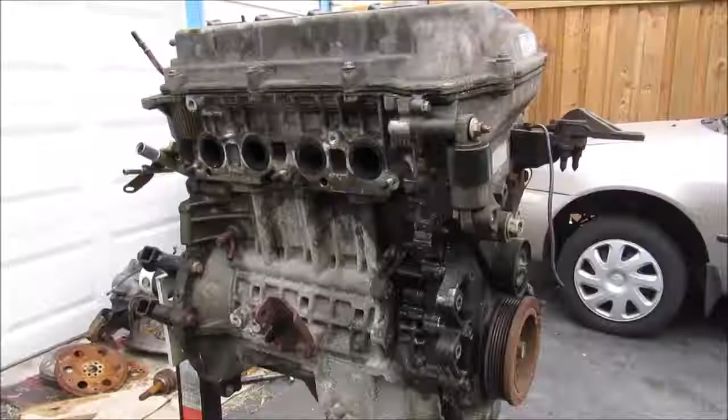Today I'm going to show you what's inside of an engine and how it works to power your car. In this video I'm going to start with the overview, the disassembly, and then the individual components.

The engine is broken up into 5 main subcomponents. At the top here we have the valve cover, then the cylinder head, then the combustion chamber or engine block, and then the crankcase at the bottom here, and then the oil pan down below.

This here is the front of the engine. We've got the crankshaft here that powers the harmonic balancer, which turns all of the accessory belts on the front of the engine. Inside of the timing cover is where the timing chain is that goes from the crankshaft to the camshaft.

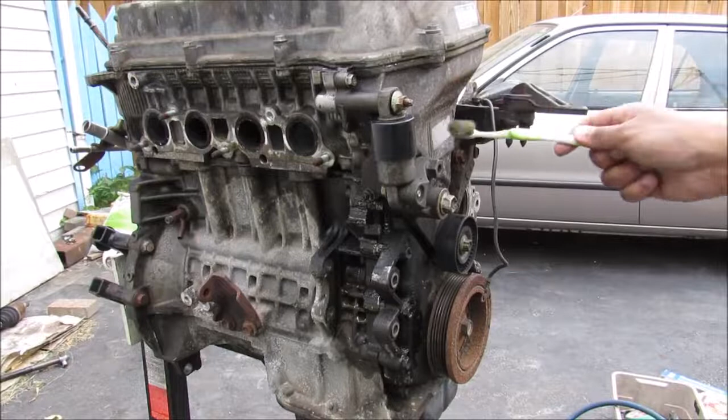Over here at the top of the cylinder head on the intake side of the engine, air goes in here. Out at the back here is the exhaust side of the cylinder head where it goes into the exhaust header. Over here we've got a couple of inlets and outlets for your cooling that goes to your heater hoses and your radiator hoses.

Down at the back of the engine is the crankshaft where it connects to the flywheel before it goes to the torque converter in the transmission.

In the engine block here we've got the coolant that enters here, we've got a water pump over here, and the starter that sits over here. Further down at the bottom we've got your oil filter, your oil pan, and then your crankshaft sensor. So we all know the basics of how an engine works.

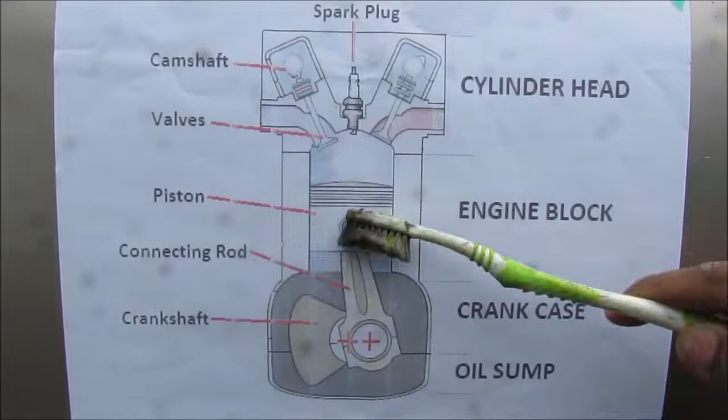We've got the cylinder over here and that has a piston inside that moves up and down. When fresh air with gasoline is drawn into the cylinder, we've got a spark plug that ignites it and causes an explosion.

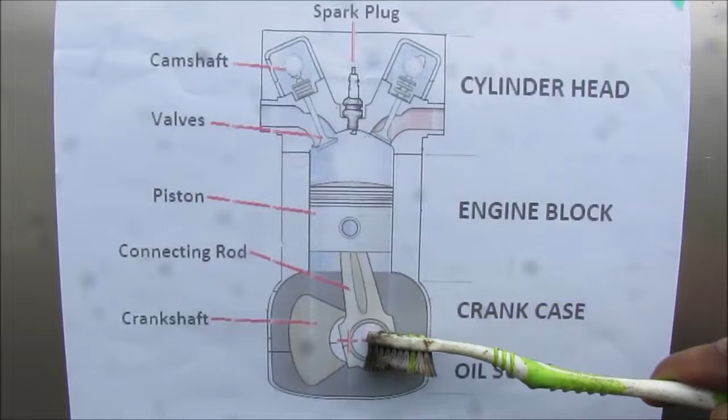The explosion pushes the piston down, and that pushes the connecting rod down against the crankshaft, which is at an offset, and that causes a torque on the crankshaft, making it rotate. That rotational motion is transferred to the wheels through the transmission.

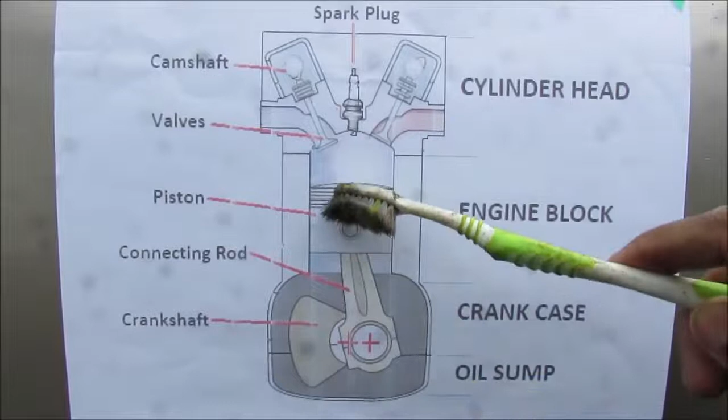When the piston moves back up, the exhaust fumes move through the valves into the cylinder head and then out the exhaust manifold. While the crankcase is the heart of the engine that produces rotational motion, the cylinder head is pretty much the brain of the engine that controls the valves through the valve train.

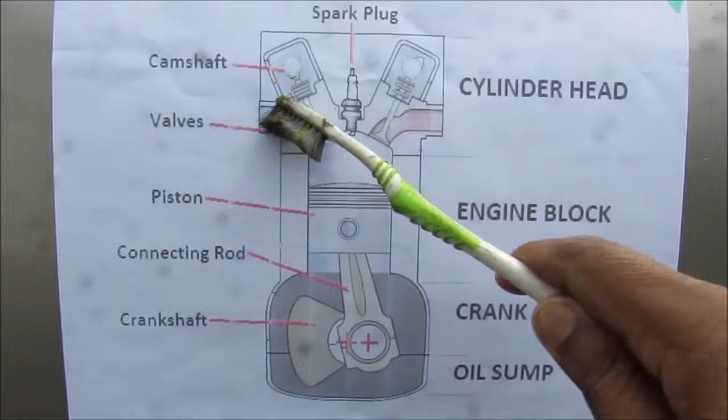Now in order to disassemble the engine, I'm going to start by removing the timing cover as well as the valve cover. I'm going to first start by removing the crank pulley bolt, and the pulley comes off.

Next I'm going to remove the valve cover from the top of the engine. With all the bolts removed, I can lift off the cylinder head cover or the valve cover.

So here's a look under the valve cover. This is a dual overhead cam engine, which means that there are 2 camshafts that control the valves that go down into the cylinders.

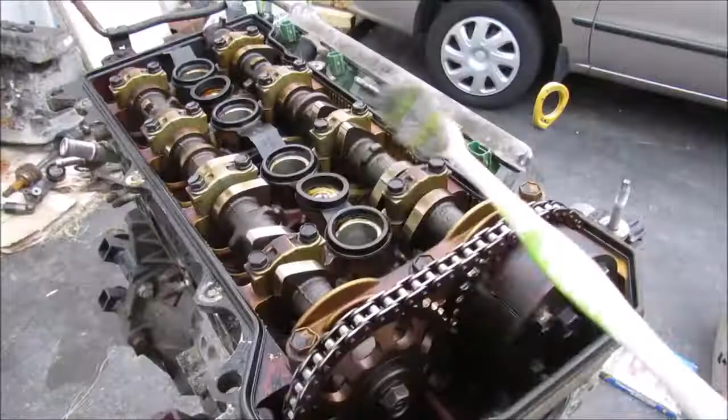Here we've got 4 spark plug holes, and then the timing chain over here for these 2 camshafts. On this engine, this is the exhaust cam that goes out to the exhaust manifold, and on this side it controls the intake valves which come in from the intake plenum. The variable valve timing happens on the intake side only.

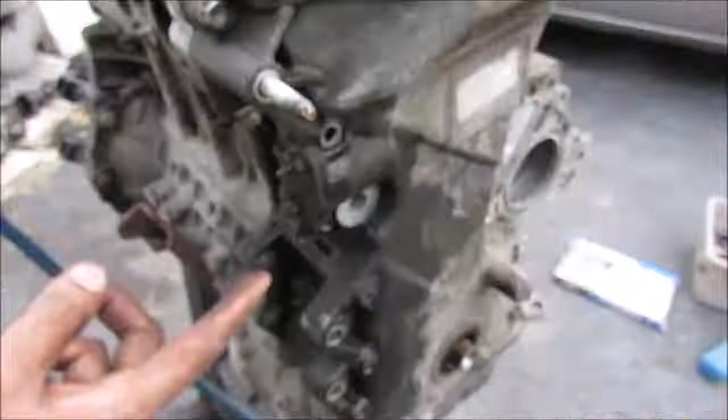With the valve cover removed up at the top here, I'm going to proceed to remove the timing chain cover. The timing chain tensioner is located inside of here behind the timing cover, and then I'll remove that.

With all the bolts removed from the timing cover, I can then proceed to remove it from the engine block. In behind the timing cover here, we've got the crank sprocket which spins the chain.

The chain will then spin the intake and the exhaust cams before it goes back over here where it gets tensioned by the tensioner. Next I'm going to remove the timing chain tensioner, then I can remove the guide.

Just to demonstrate how the timing chain works, you've got the crankshaft here which turns this chain, and that turns the cams at the top. Now with no tension on the chain, I can go ahead and remove it.

So this is how the camshaft rotates. Underneath these caps here is your journal bearings, and that's the interface between the camshaft and the head itself. That needs to keep well lubricated in order to operate smoothly.

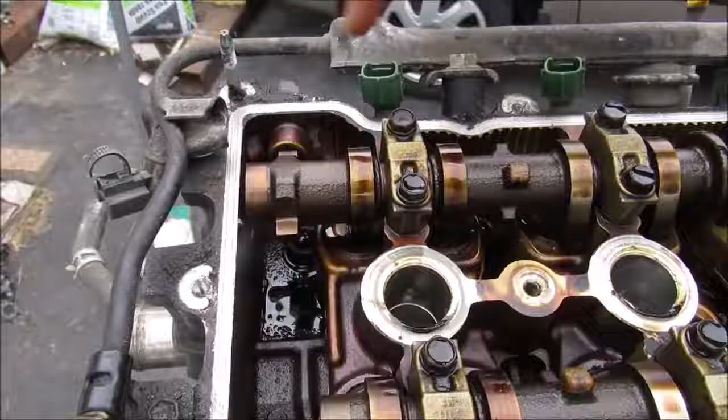Over here is the cam position sensor, and it senses the position of this camshaft according to these tabs on the end of the camshaft on the intake side. The tab moves in front of the sensor and the sensor will pick that up.

Next I'm going to remove the camshafts. There's a couple of 12mm bolts over here on the timing side of the engine, as well as all the 10mm bolts that hold the bearing caps on the intake and exhaust side. I'm going to remove these cam bolts.

14mm. This is the variable valve timing gear. And now I can remove the intake camshaft off of the engine head.

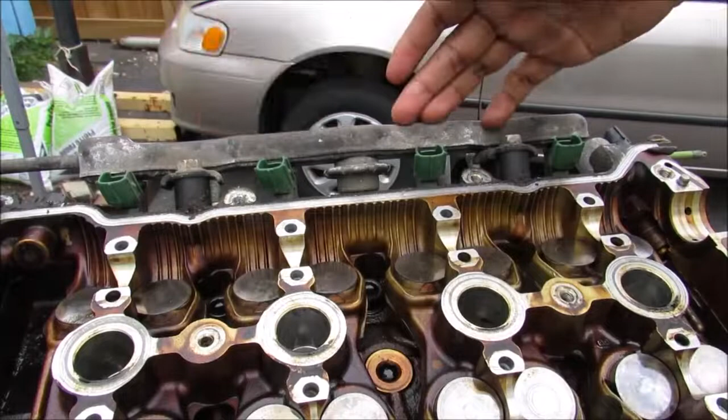Over here on the intake side of the head is the fuel rail. It's held in by these 2 14mm bolts. These green things here are your fuel injectors. And then I can pull this fuel rail off.

This here is where the oil control valve is located for the variable valve timing on the intake side. And then I can remove the valve.

Now the head of the engine is held in by 12 bolts. These are bi-hexagon 10mm bolts. I'm just going to be using a plain hexagon 10mm socket to take them out. And this is what the head bolt looks like.

Alright, so now that all of the head bolts have been removed, I can lift off the head from the cylinder block. And now I can remove the head gasket.

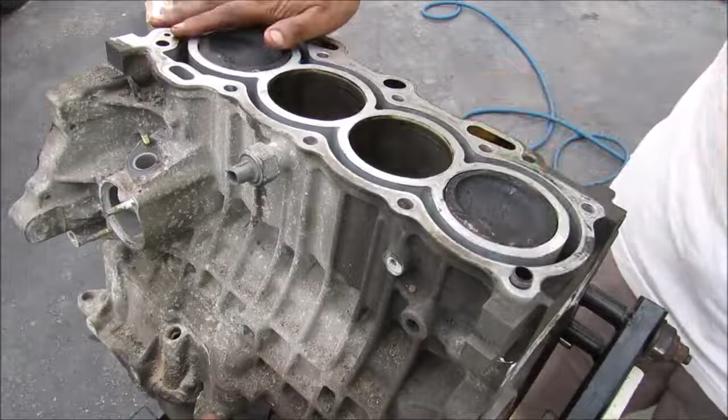So this here is the engine block with the head removed. You can see this is the pistons here. This is a 4-cylinder engine. You can see when I rotate the crankshaft clockwise that the pistons move up and down.

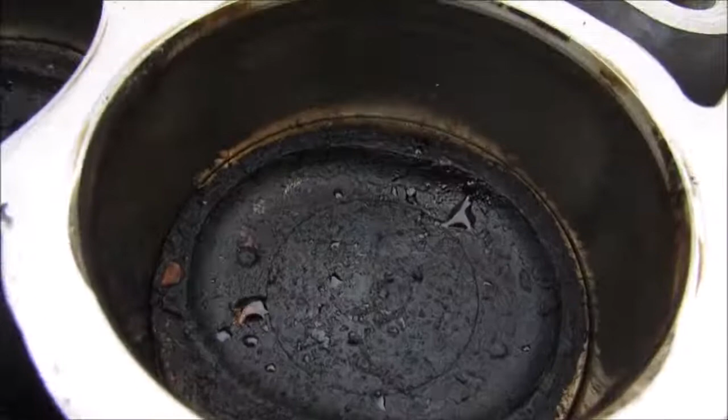You can see the general condition of this engine here. The pistons have a lot of carbon buildup, but the walls of the cylinder are smooth and don't have any major grooves. So now I'm going to rotate the engine upside down so I can work on the bottom.

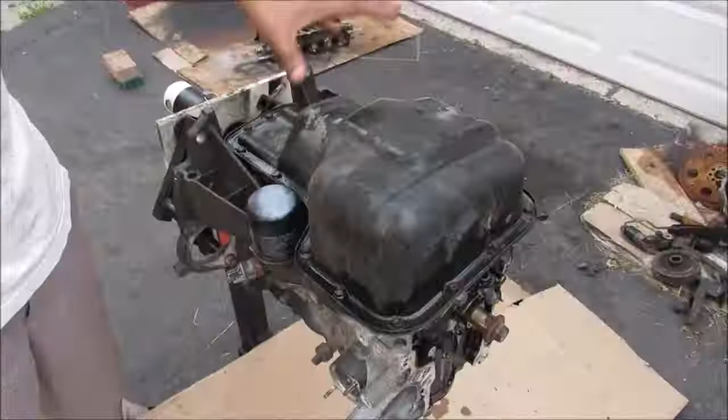So with the engine turned upside down, I'm going to next remove the oil pan. It's held on by 16 10mm bolts and nuts that go around the circumference.

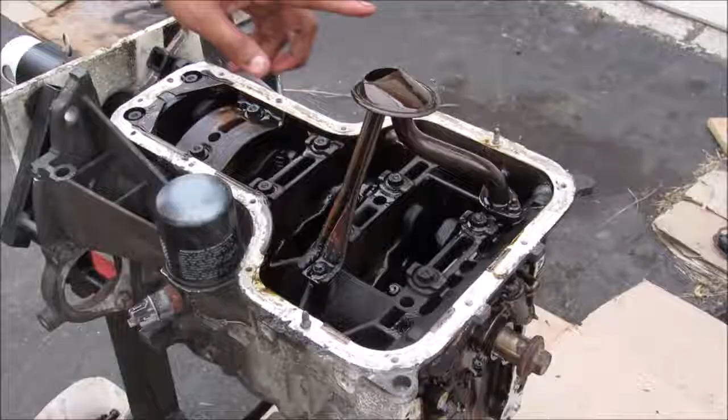This here is the oil pickup screen and tube. It picks up oil from the sump and it feeds it to the oil pump over here.

Now if you look inside of here, you can see how the connecting rods and the pistons move up and down when I turn the engine. This here is the crankshaft. It's pretty much the heart of the engine.

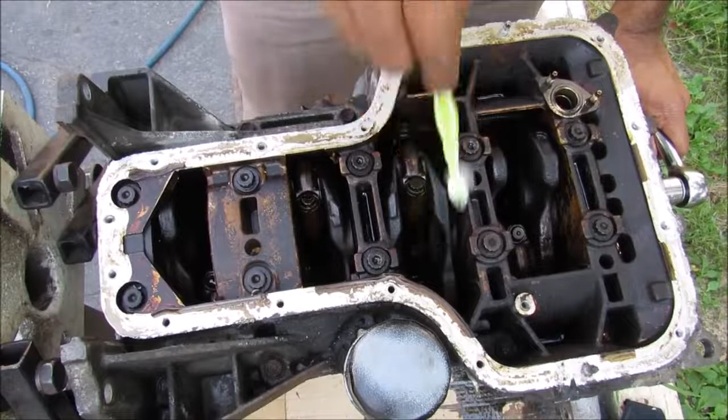Now throughout the middle here we have 5 main bearings that run through the center of the crankshaft. Underneath this bearing cap here is where the connecting rod, which moves up and down with the piston, connects to the crankshaft. And you can see that it's offset from the center line of the crankshaft. The distance between the center line and the connecting rod is called the throw, and that will determine the stroke of the piston.

While the engine is running, the oil pump ensures that this entire crankcase assembly is well lubricated in oil.

Next I'm going to remove the bolts that hold the main bearing to the crankcase. These are 12mm bolts. I've got a 12-point socket for it there, and I'm going to use it on a breaker bar to break them free.

Now I'm going to break free the bolts that hold the bearing cap onto the connecting rods. These are 12-point sockets, 10mm. Now I can remove this bearing cap.

So with the connecting rods from the pistons free from the crankshaft, I can just move the crank a little bit and reach down with my brother's toothbrush and push the piston out the bottom of the engine.

Oh crap, I got a toothbrush in the engine. And I can catch it just like that.

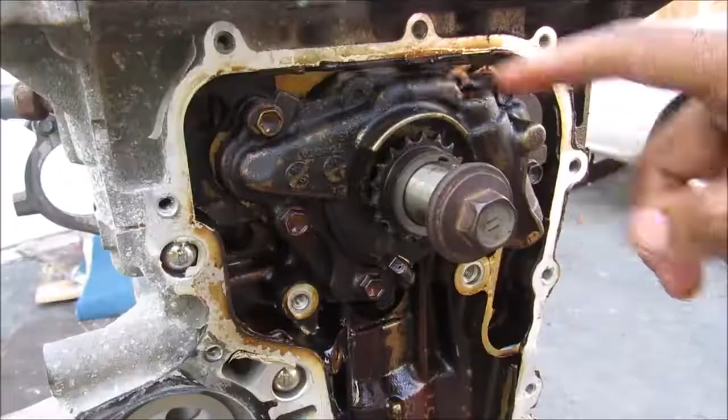And there's a piston. This here is the oil pump. It's responsible for pressurizing the engine to ensure all of the components are lubricated properly.

And then the oil pump, you can see that the crankcase here is a separate piece of the engine block down here. So we're going to have to split this and remove the top part in order to get the crankshaft out.

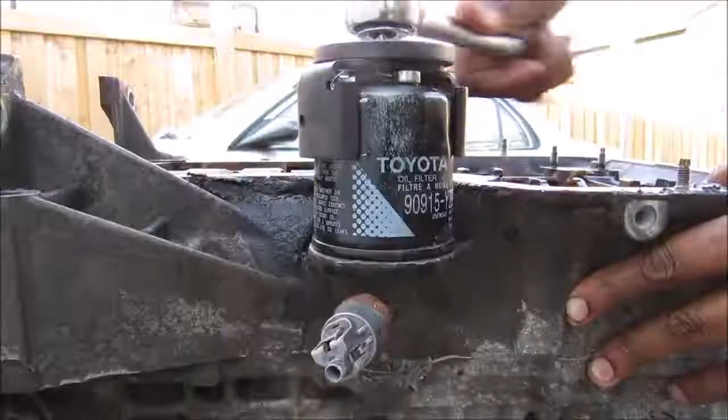Remove the oil filter. So with the oil filter removed, I need to remove this 12mm hex bolt. Now I can remove the 12mm bolt that was behind the oil filter.

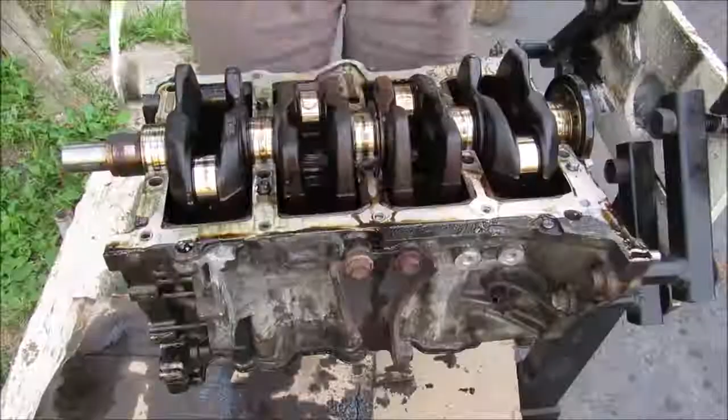Now I can remove the entire crankcase off of the bottom of the cylinder block. So with the crankcase removed, we have a clear view of the crankshaft with the offsetted connecting rod bearings up here, the 5 main bearings over here, as well as the counterweights over here.

So what's also interesting are these holes on the bearing surfaces that allow oil to penetrate between the bearing itself, the crankshaft, as well as the engine block assembly. This rubber seal over here is called the rear main seal, and that seals off the crankcase, which holds engine oil from the transmission side of the engine.

A lot of times these will leak and cause a leak between the engine and transmission, and it's very expensive to replace because you have to completely remove the engine or the transmission from the vehicle.

Now I'm going to remove the crankshaft from the engine block. It's pretty heavy. And here's a look inside of the engine block with the crankshaft removed. Here we have the bearing surfaces where the bearing rides up on.

You can see that there's a slot inside of here where oil will come from inside of here to lubricate this bearing. Now sometimes you'll hear the term "you've spun a bearing," and what that means is that if this bearing is starved of oil, it fuses to the crankshaft and that causes it to spin. And once it spins, it leaves a gap on the bottom of the crankshaft, and that causes the engine to knock because of that gap that you left down at the bottom there.

This here is the engine block where it mates to the head. We've got a coolant jacket that runs around the cylinders to keep it cool. Now it's very important that this surface is machined really flat, because when the head is bolted on, it has to hold a lot of compression from the combustion that happens in the chamber.

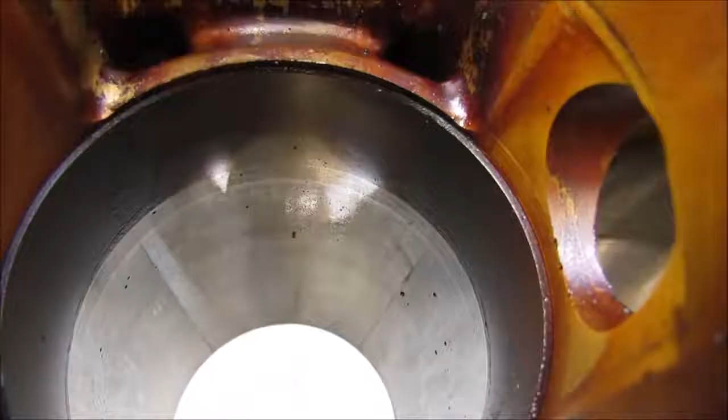Over here we have 3 oil return galleries that will take oil from the head and return it back down to the sump. And this little hole over here supplies the head with oil. Now when they say that your head gasket has blown, that means that this gasket has failed and it's losing compression between cylinders, or it could mean that the coolant is mixing with the oil, and that's bad. You'll also notice that the cylinder walls are actually a steel insert inside of the aluminum block.

This is the head of the engine removed. Now the cylinder head here houses the camshafts that control the valve movement throughout the 4-stroke cycle.

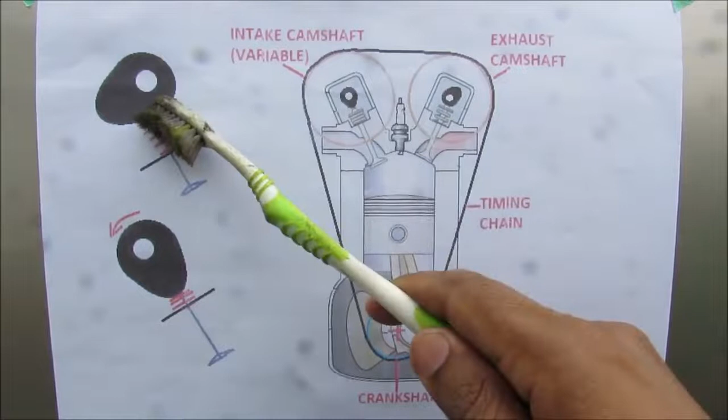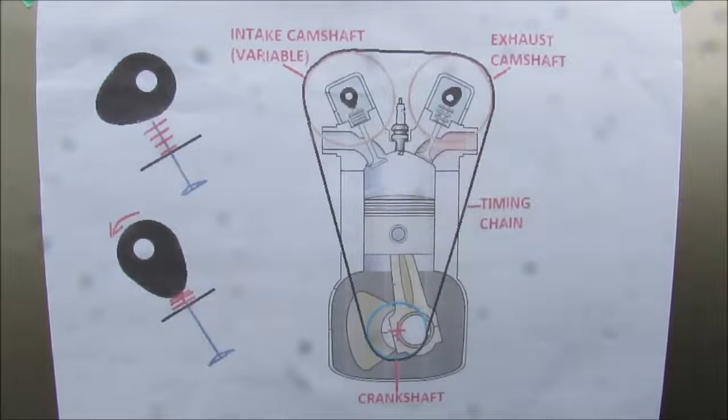Now the camshaft has a bunch of these eccentric cam lobes that rotate, and we've got the valves here which are spring-loaded. When the camshaft rotates such that the lobe hits the valve, it will actually squish the spring down, pushing the valve into the cylinder, and that will allow inlet air to come in or exhaust gases to escape during the cycle.

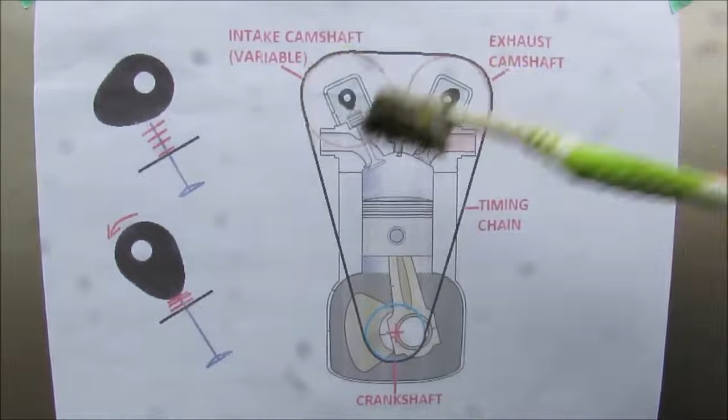Now in order to link the movement of these valves at the top here with the position of the piston in the 4-stroke cycle, we have a timing chain that goes from the crankshaft to the intake cam and then the exhaust cam. On this particular engine, the intake camshaft is variable, which means that the timing that this valve moves in and out can be controlled by the ECU.

We've got 2 exhaust valves and 2 intake valves on this particular engine for a total of 4 valves per cylinder. You can see that when I rotate the intake cam, how the cam lobes will actually push down on the valves, opening the valves into the cylinder head.

So if you watch the intake valves over here, as I rotate the engine, you can see that they're moving in and out according to the position of the camshaft.

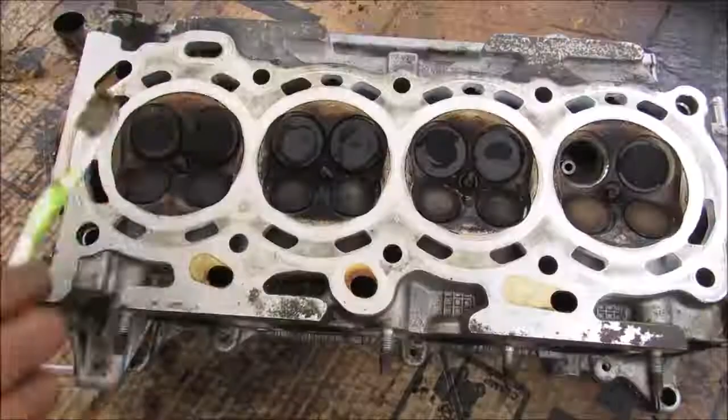So here's a look at the bottom of the head. You can see that all around the cylinders is the coolant jacket where it cools off the head, and then it exits out that side to the radiator. We've also got the oil return ports at the bottom here, as well as the supply port at the top here to lubricate the camshaft.

Now in order to remove one of these valves, I'm just going to use my spark plug socket and whack it with a hammer, and that will release the two holding pins. And I've got the valve spring, I've got the retainer at the top here. Now I can just pop out the valve from the bottom here.

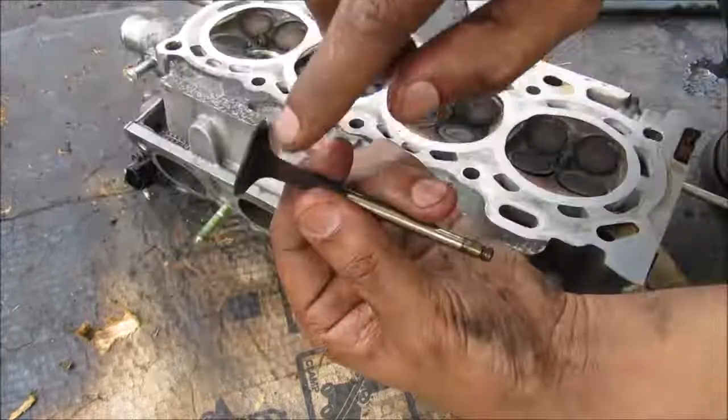And the valve here has this groove, which is called a valve seat, where it seals against the cylinder head. And you've also got an oil seal at the top inside of the cylinder head that seals against oil dripping down into the cylinder. Now if you look closely inside of there, you can see the valve stem seal, and that's used to prevent oil from going from the valve head into the engine.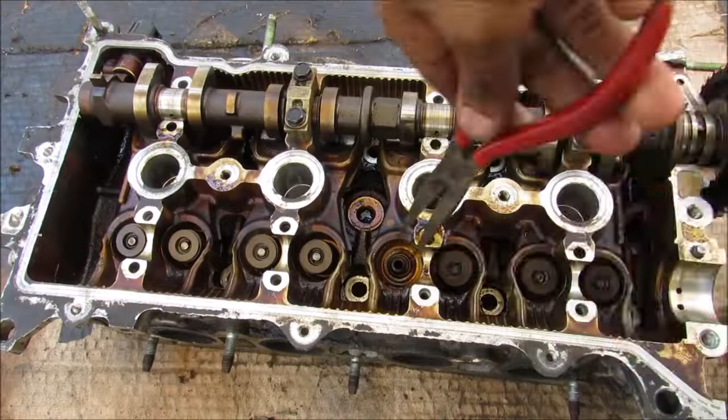Now each of these valves have a little cap on them where the camshaft will ride up against. Now the camshaft itself is pretty light and hollow, and it's got these holes inside here to help lubricate the bearing surfaces along the camshaft length.

Now this camshaft profile is specifically designed in terms of its width, its height, as well as its rotational position relative to the rest of the shaft to control the valve timing, when it will open, how long it will open for, and how deep it will open, as well as when it will open in the combustion cycle.

Now in between the intake and exhaust cams you have the spark plugs, and that provides a spark to ignite the fuel mixture in the cylinder. When the valve cover is on, you've got an ignition coil that sits on top of the spark plug, and that transfers the 12-volt signal from the computer into many thousands of volts to fire that spark.

You can see on the bottom of the head, in the middle of these four valves, is where the spark plug is located. Sometimes these spark plugs will wear down and get carbon buildup on them, and they'll need to be replaced in order to keep a good spark.

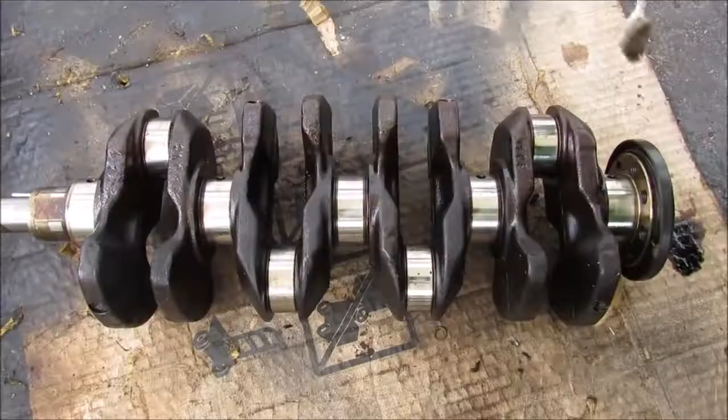And this here is the crankshaft. We've got the center that goes around with the 5 main bearing surfaces, and then we've got the counterweight, which is opposite of the connecting rod of each piston. Each counterweight looks like a casted piece, but it actually sounds kind of hollow. It's very important for this crankshaft to be extremely balanced because it will produce a lot of torsional vibration from the reciprocating motion of the pistons.

In a manual transmission car, we usually have a flywheel which has some weight to it that's mounted to the transmission side of the engine. In an automatic car, we've got a torque converter, and that helps to dampen some of that torsional vibration. On the belt side of the engine, we have what's known as the harmonic balancer, and that serves as the pulley, and it also helps to dampen some of that torsional vibration.

Now on the center bearing, we've got the semicircular thrust bearings.

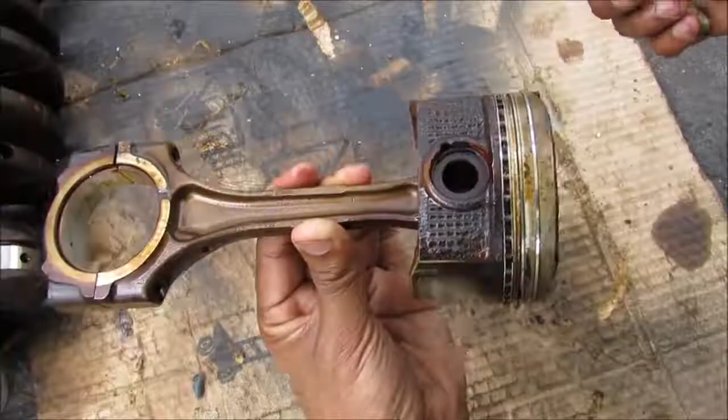So here we have the piston, and on this side is where all the explosive action occurs that pushes down the piston. On the side of the piston we have 2 compression rings, and then we've got an oil expander in between, followed by 2 oil rings on either side.

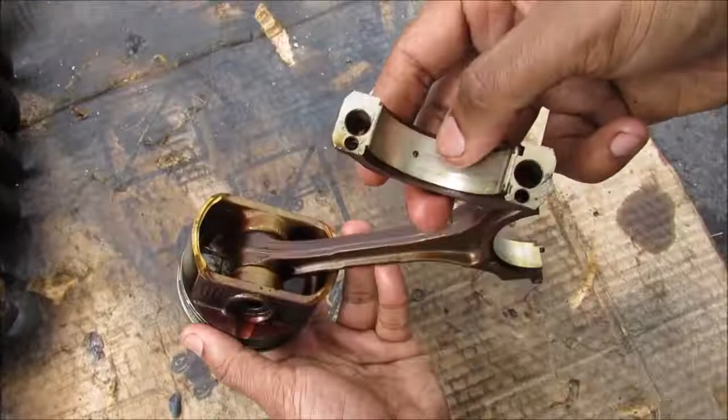Then we've got a piston bushing that connects the connecting rod. This is a forged piece that goes down to the bearing at the bottom. To aid with lubrication, we've got a little hole here where oil will come from the crankshaft and lubricate this bearing. Then it will exit here and go through the top of the connecting rod where it will spray into the piston walls as well as this bushing up here.

Now I can tap out the bushing. With the bushing removed, I can remove the connecting rod, which is just a forged piece, and the bushing. Up at the top we've got the piston rings, we've got 2 compression rings and the oil rings here, and I can remove it like this.

Sometimes these rings can wear down and cause a loss of compression or cause the engine to burn oil, and then you're in for an engine rebuild. The purpose of these rings is to seal against the cylinder walls so that the combustion is kept within the combustion chamber, and the oil ring will whisk off any excess oil so it doesn't go into the combustion chamber and get burnt.

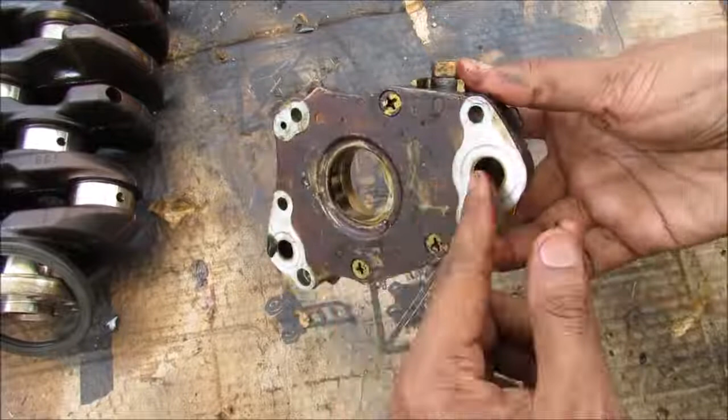This here is the oil pump removed from the engine. We've got the inlet here and the outlet on this side, and it's driven by the crankshaft of the engine. Now the timing chain cover pretty much seals the front half of the engine.

Over here we've got the crank seal, and we've got the crankshaft sensor, and the crankshaft sensor will read off of this little gear that's spun by the crankshaft. Over here we have a little hole that will feed oil to the timing chain tensioner.

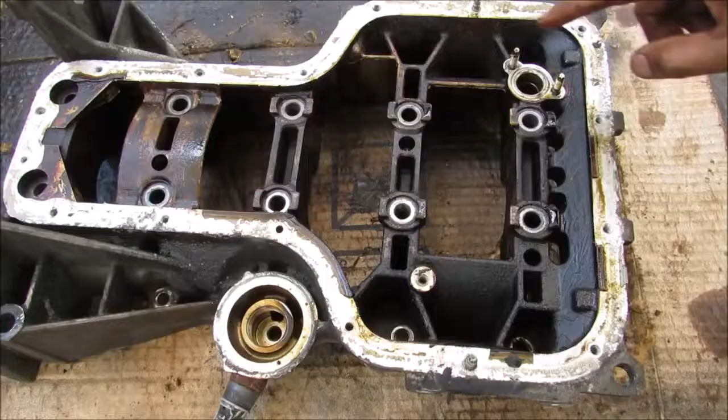This is the crankcase. It's just a piece of cast aluminum. These are the spots where the crankshaft will ride up against the main bearings, and you can see we've got some oil passages that go to the oil filter. This is the oil pressure sensor, and on the bottom we've got the inlet for the pickup tube where the oil pump will draw oil from the sump.

Now modern engines are built with very high tolerances, so in some cases your valves could actually extend into the combustion chamber, and if your timing is off, your piston could come down and clash and hit those valves and bend them. This is called an interference engine.

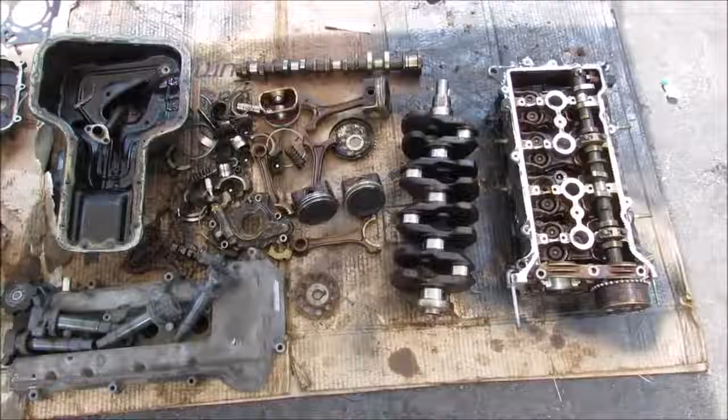So the next time you start your car, give it a second thought to think about all of the engineering that goes inside of your car's engine.

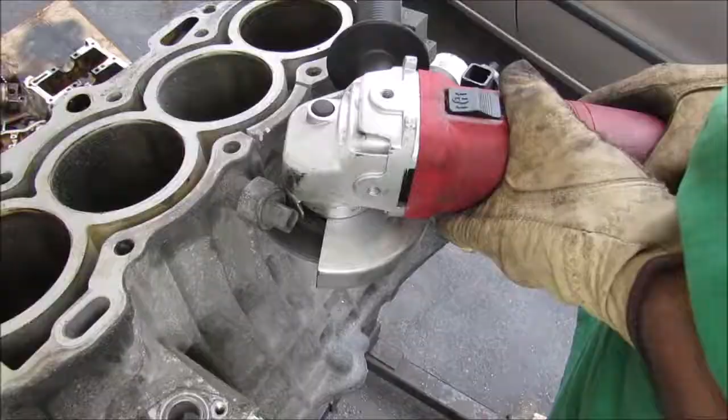So to get a better idea of what it looks like inside of here, I'm going to chop it open. And there you have it, a chunk off of the engine and what the water jacket looks like around the cylinder.